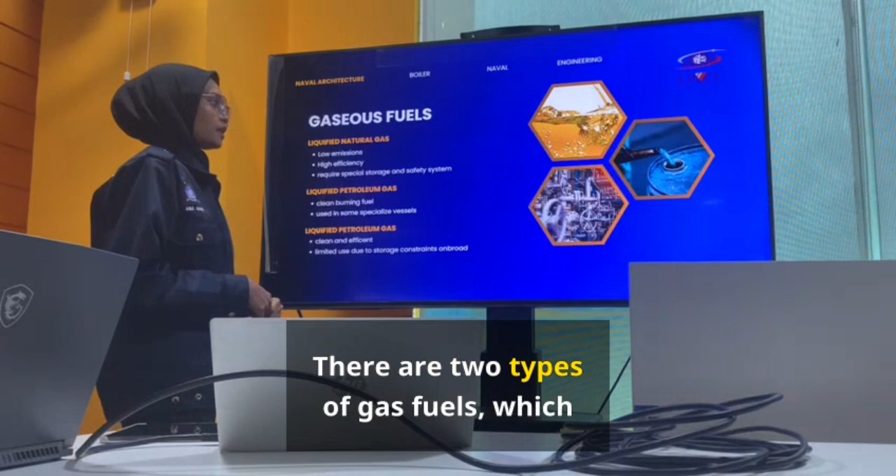Moving to the next type of fuels, gaseous fuels. There are two types: liquefied natural gas and liquefied petroleum gas. Liquefied natural gas has very low emissions and very high efficiency, but it requires special storage and safety systems.

For liquefied petroleum gas, it is a clean burning fuel and is usually used in some specialized vessels.

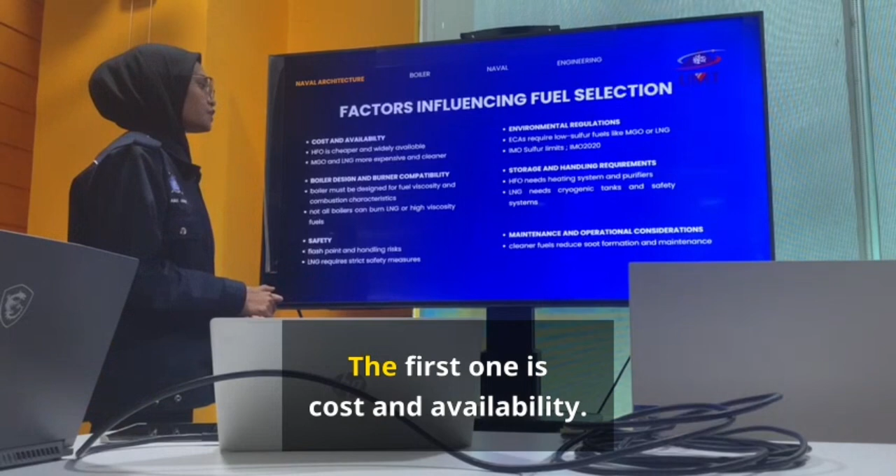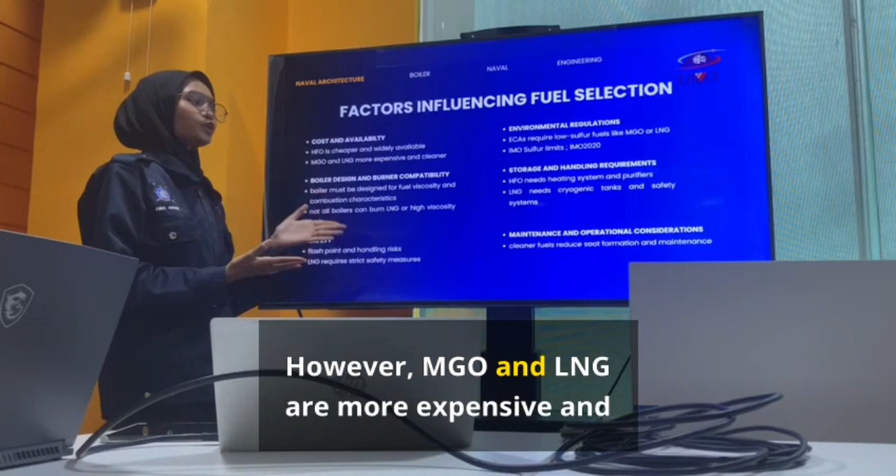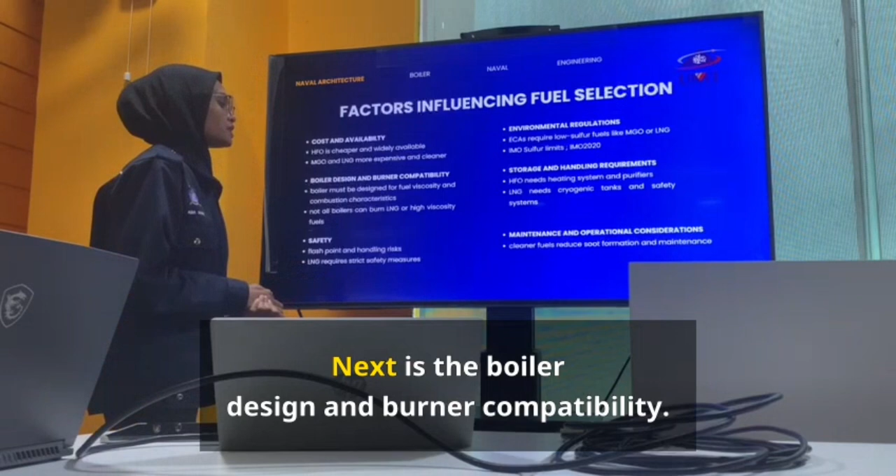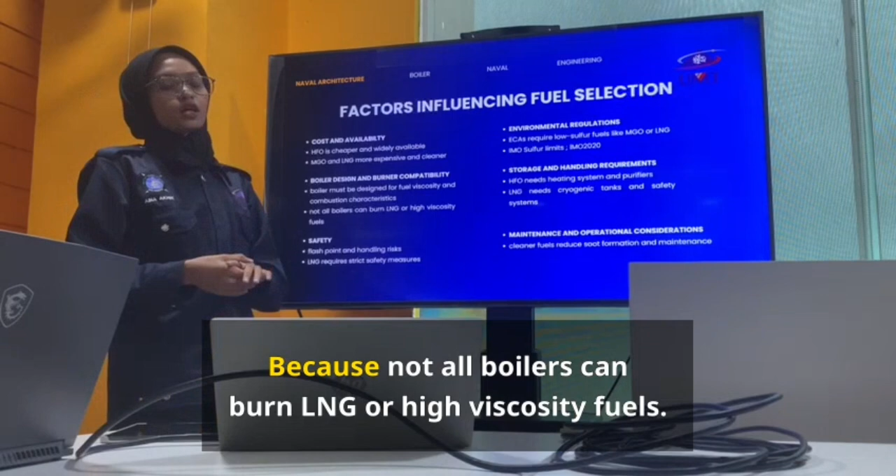Next is boiler design and burner compatibility. The boiler must be designed for fuel viscosity and combustion characteristics, but not all boilers can burn LNG or high viscosity fuels.

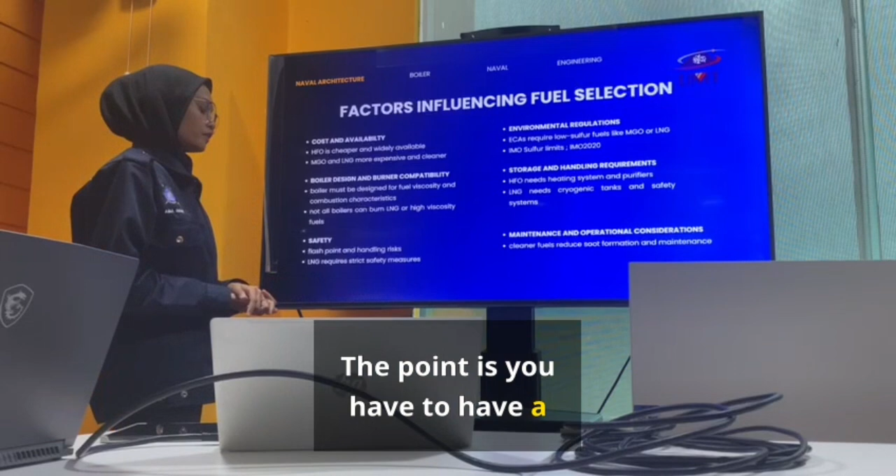Next is safety. The point is you have to consider the flash point and handling risk. As an example, LNG requires strict safety measures.

Moving to the next factor, environmental regulations. ECAs require low sulfur fuels like MGO or LNG.

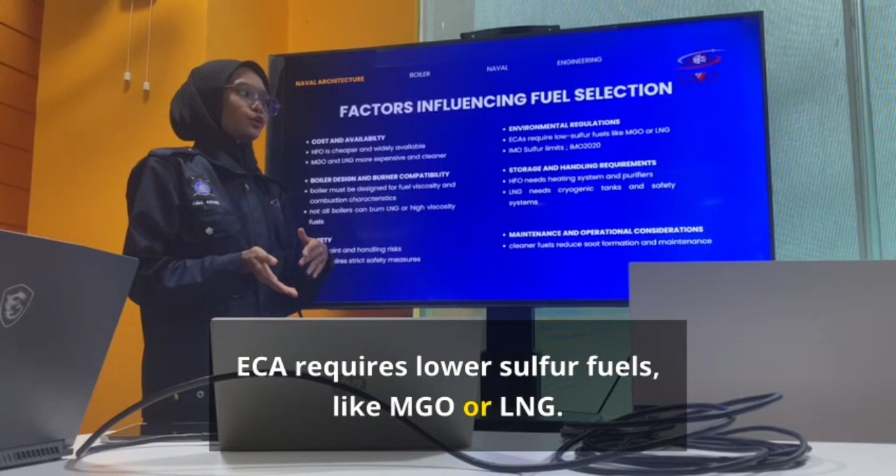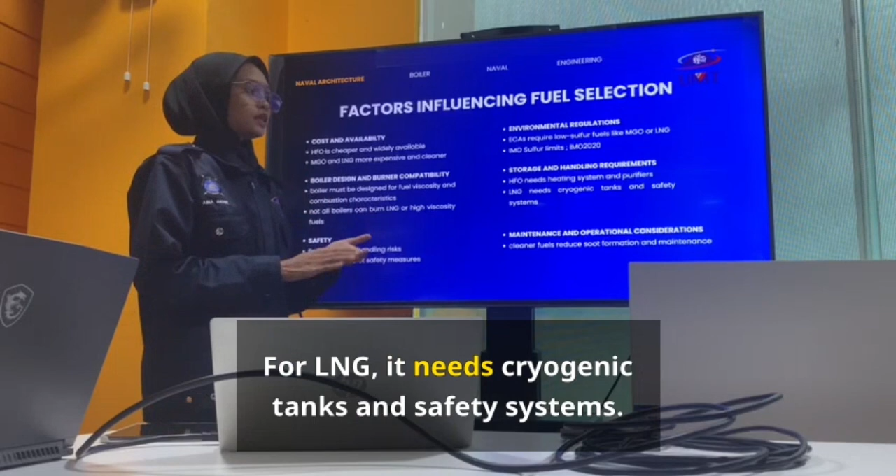Next is storage and handling requirements. HFO needs heating systems and purifiers, while LNG needs cryogenic tanks and safety systems.

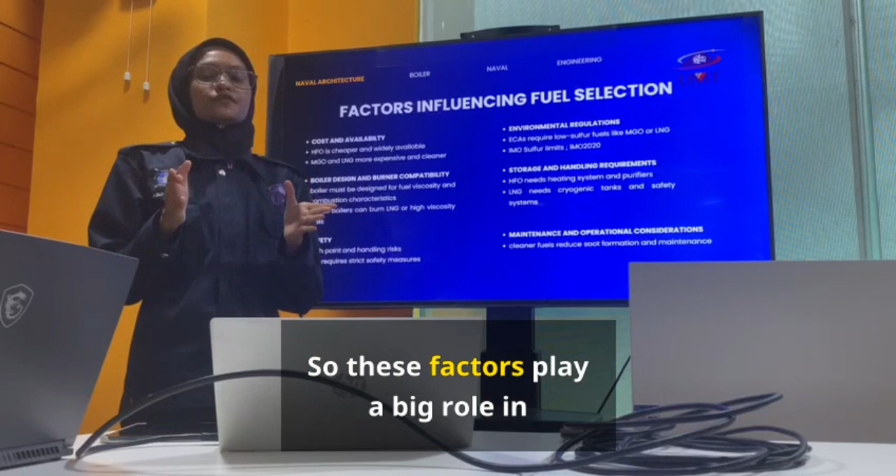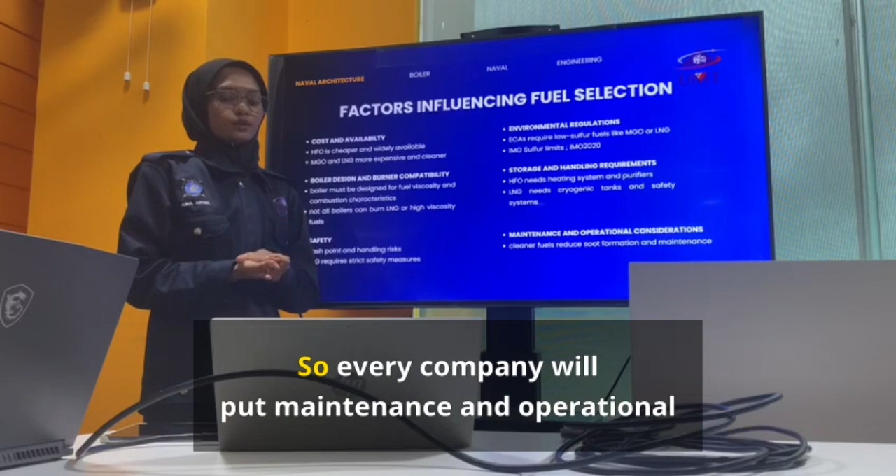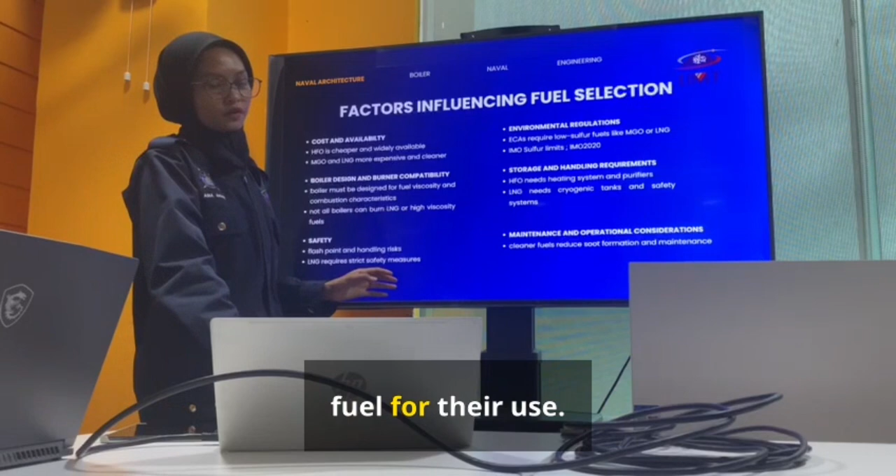Moving to the next factor, maintenance and operational considerations. These factors play a big role in fuel selection. Cleaner fuels reduce soot formation and maintenance. So every company will put maintenance and operational considerations as the main point in choosing a fuel for their use. I think that's all for me. Thank you.